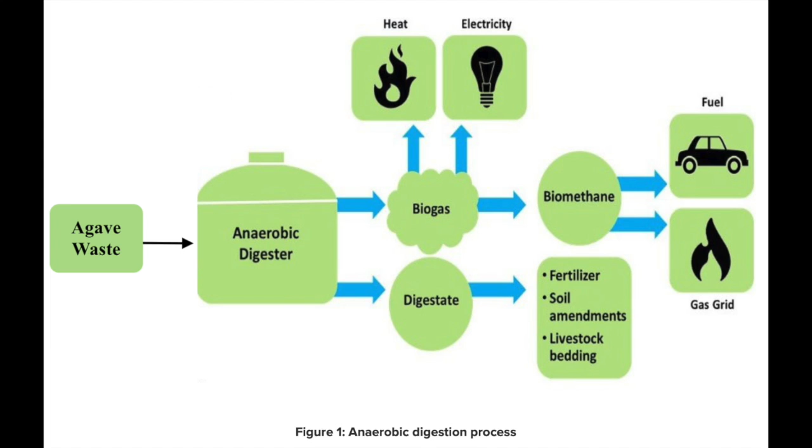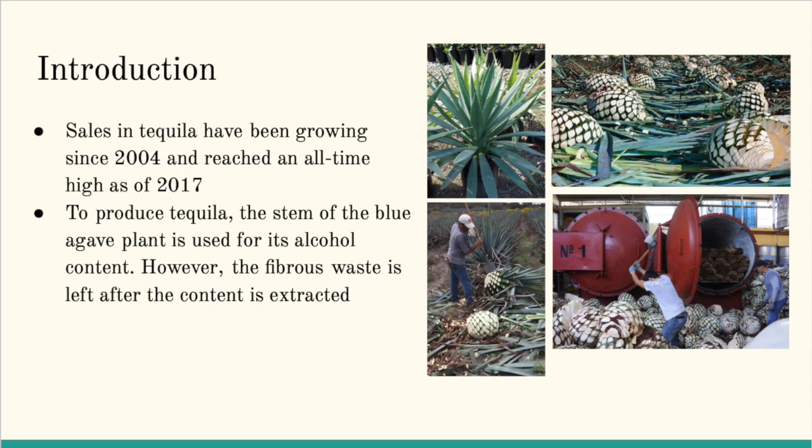Tequila distilleries employ the use of the blue agave plant to produce mass amounts of tequila per year. To put this into perspective, from January to May of 2018, according to the Consejo Regulador del Tequila, the agency that oversees tequila production in accordance with regulatory standards, 132 million liters of tequila was produced in the protected regions of Mexico.

As you can see, the volumes of tequila being produced and the growth of tequila sales are consistently increasing with every passing year. This implies that the production as well as the demand for the product is also increasing every year. Because of this trend, we decided to implement a plant that produces biomethane from the waste accumulated from these tequila distilleries in Mexico employing the technique of anaerobic digestion.

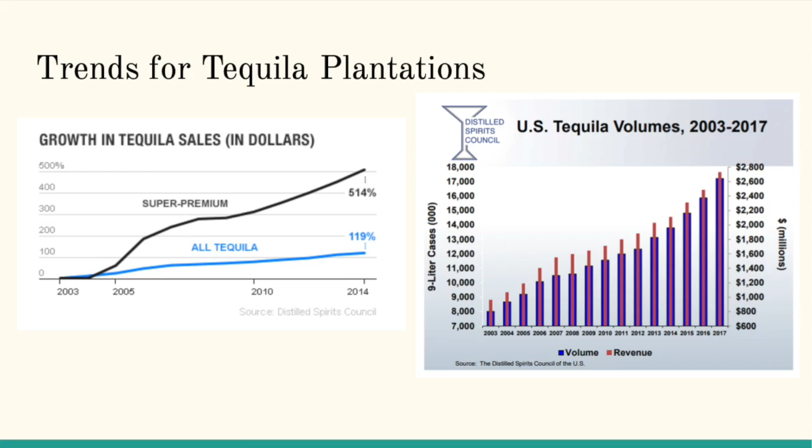The inspiration of this proposal is derived from the current outlook on climate change and the use of fossil fuels versus renewable energy, such as biomethane. Our goal is to implement our recycle plant into the tequila distilleries in order to reduce their carbon footprint by the use of biomethane instead of fossil fuels.

There have also been other biomass to biomethane projects that include avocado stones, mango stones, and other agricultural materials as inputs to the process. The graph from a paper written by Pål Börjesson shows the average percent in reduction of greenhouse gases when petrol or diesel is replaced by biomethane.

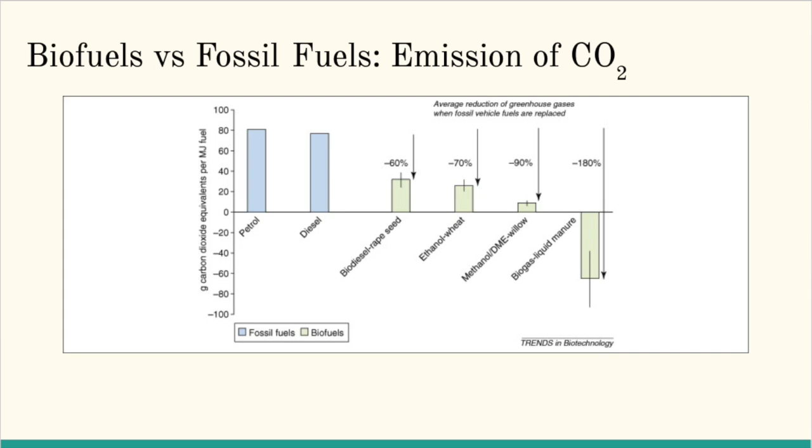The use of a plant-based energy source reduces carbon dioxide emissions, which is why we ultimately chose blue agave as the process input. Blue agave uses a metabolic pathway that greatly reduces water loss and increases carbon dioxide intake called crassulacean acid metabolism, or CAM. During CAM, the plant stores carbon dioxide absorbed at night and performs photosynthesis during the day.

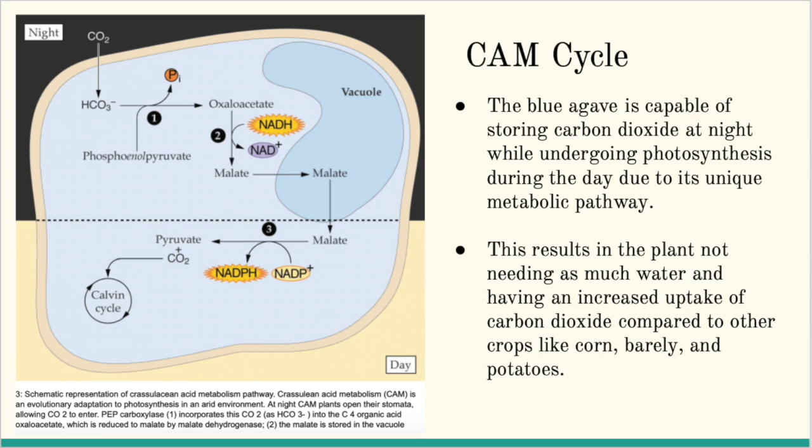This means they can close their openings on their leaves during the heat of the day, saving a tremendous amount of water compared to other crops such as corn. It also allows for the use of higher levels of carbon dioxide than other crops like wheat, barley, and potatoes.

During the anaerobic digestion, two species of cellulose-degrading bacteria will be used to break down the blue agave. Ruminococci, R. flavefaciens and R. albus, are found in the rumen of horses and cows and play a major contribution to plant cell wall breakdown in the large intestine. Based on the experimental data, the major chemical composition of the fibers in blue agave is 74.6% cellulose and 21.1% lignin.

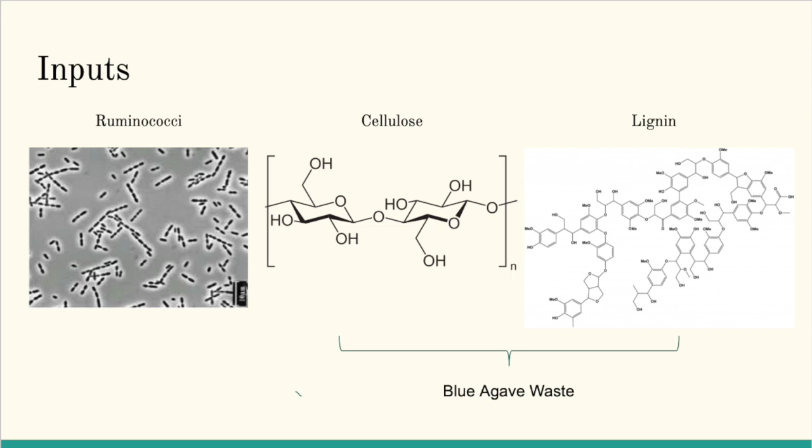For our production plant, the inputs will be the ruminococci, acetic acid, and blue agave waste. The output for the process will be carbon dioxide, methane, and the solid waste of the soil conditioner. The agave waste will be brought in as a fibrous solid and be ground into small particulates and heated up to be broken down further.

Because our system is a batch system, the bacteria and acetic acid will be present in our reaction vessel. The blue agave particulates will be added to our reaction vessel for the cellulose to be degraded mostly into methane and carbon dioxide. The gas products will enter the scrubber in order to separate the methane and carbon dioxide. As for the solid liquid waste products, the solution will be separated in order to obtain soil conditioner that can be used when planting agave plants.

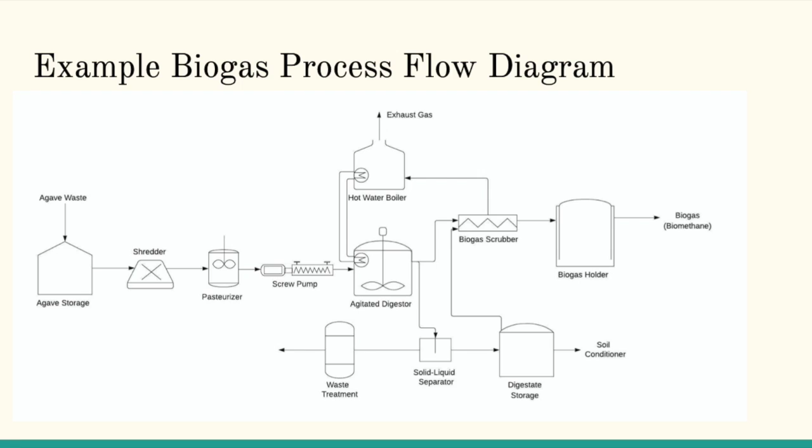This is an example of a process flow diagram of our plant. Our design alternative 1 includes breaking the reaction into two reactors to produce methane, one reactor for the acid phase and one for the gas phase. A similar process can be used for the alternative design 2.

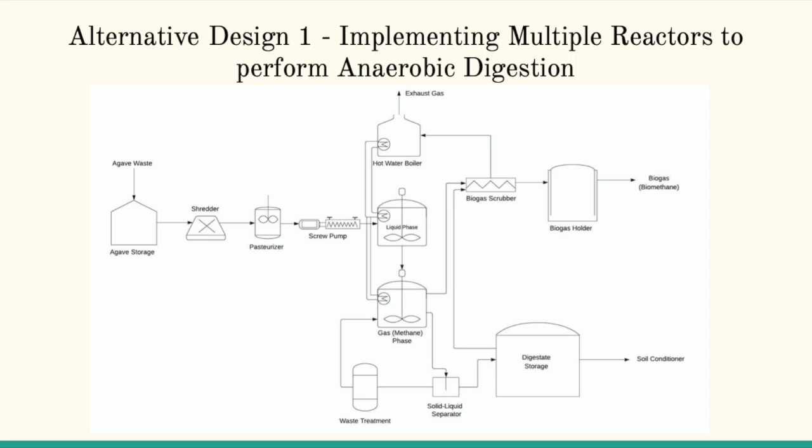Instead, the solvent used to dissolve cellulose could be changed to 1-allyl-3-methylimidazolium chloride and 1-ethyl-3-methylimidazolium acetate. The use of these strong ionic liquids allows for the cellulose to be broken down into its glucose compounds, which will require less bacteria to be used for the process. However, these solvents are extremely costly and are not viable for a profitable plant.

Other successful processes have demonstrated the use of 4 reactors, one reactor for each step of liquefaction, acidification, acetate formation, and methane formation. Potential challenges with these methods would be that the cost of multiple reactors is very expensive, as well as the solvents and other components needed if the process was split up into parts.

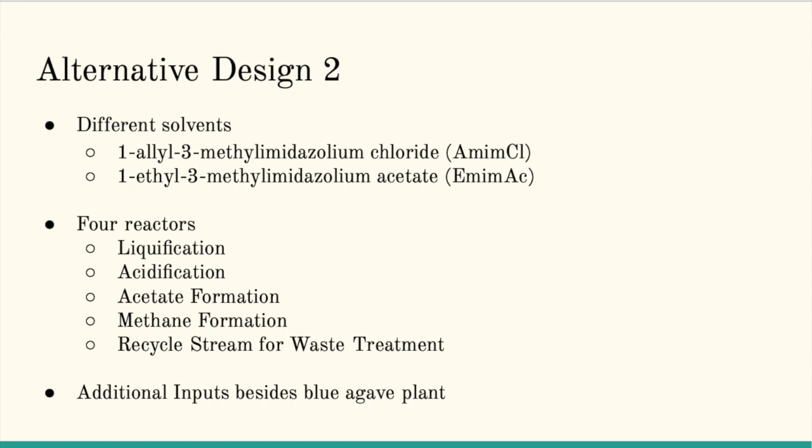Operating at such high pressures is a safety concern and would need further research on how to operate at these conditions. Various types of inputs include corn, barley, wood, peanut shells, and wheat to be used as inputs as well. This, however, requires more solvents and bacteria due to the variety of chemical compositions for these compounds.

Some design considerations to take into account when building our anaerobic digestion plant are environmental impacts, social impacts, safety hazards, and their precautions. Some positive environmental impacts include reducing the greenhouse gas emissions, which mitigates environmental pollution, as well as the digestate being recycled and used as soil conditioner to provide the blue agave with a beneficial growing environment.

Some negative environmental impacts include causing the rate of excess in crop demand of blue agave, as well as ammonia emissions and nitrate leaking of digestate if improperly stored. The main social impacts include changes of natural and agricultural landscapes while building our new plant next to the tequila distilleries, risk of pollution incidents, odors, intrusion of land, and the shredder being extremely loud.

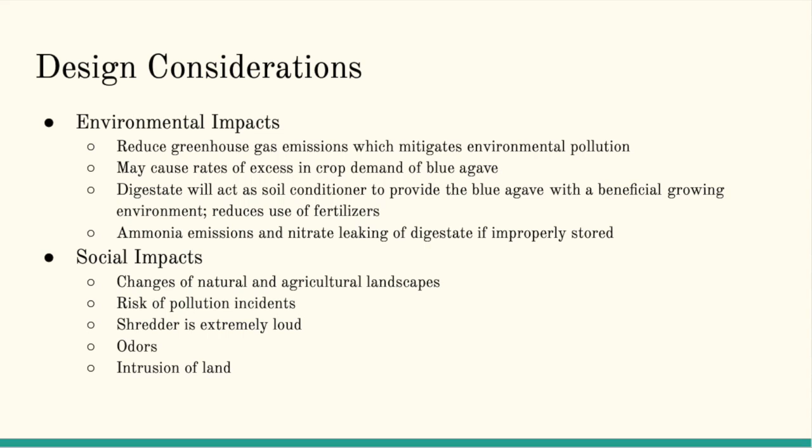Some safety hazards that we need to consider are that the biomethane, as well as the exhaust gas being produced, is combustible and corrosive, and the generation, transportation, and flaring of the biomethane can lead to oxygen deficient atmospheres, which can go hand in hand with the environmental impacts as well. The corrosive nature may also cause the equipment to break down, which would cause additional safety hazards to the operators on site.

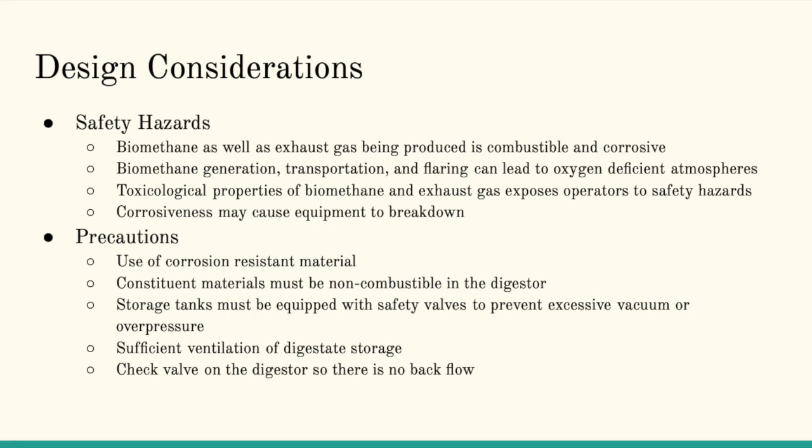Some of the main precautions that need to be taken when building this plant are the use of corrosion-resistant material, as well as making sure the constituent materials being used in the digester are non-combustible. As for the equipment, the storage tanks must be equipped with safety valves to prevent excessive vacuum or pressure, and check valves need to be on the digester so there is no backflow of biomethane.

Based on an input blue agave waste of 11,000 tons per year, or 66,000 pounds per day, for an operational time of 333 days per year, an input of 66,000 pounds per day of acetic acid will be used as well in order to be used as a solvent. Because our agave plant is considered waste, it will not be considered a large purchase compared to our other costs. Also, because the bacteria will be grown in our plant, the bacteria and media will need to be purchased and grown before the process occurs.

For acetic acid and bacteria waste, because it is considered a biohazard, it will have to be treated. Soil conditioner will be included when planting blue agave to maximize the waste of our system. Based on values from the Department of Energy of methane, we will have a profit of $151 million per year on an input-output level assessment.

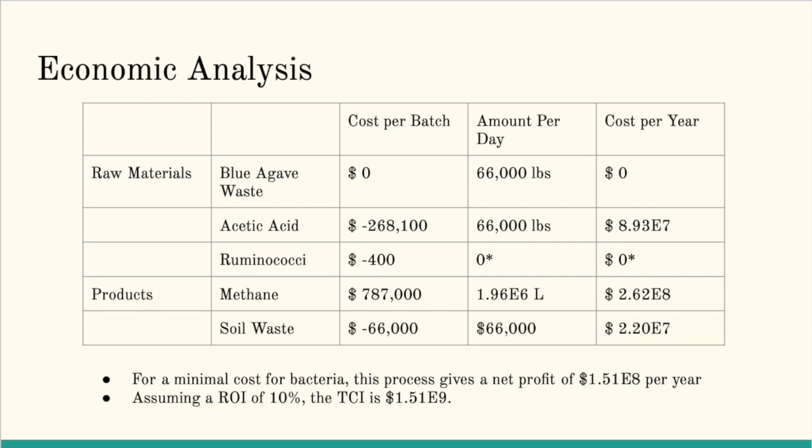Assuming a 10% break-even capital cost, our total capital investment is $1.5 billion. Because our plant is a grassroots project, it seems viable and should continue. We are claiming that our plant is viable due to the fact that building an anaerobic digestion biogas producing plant from the ground up would cost less than $1.5 billion.

In order to improve our assessment, much more research needs to be done for the equipment and utilities for our plant, including manufacturing, cost of labor, cost of installment, and other miscellaneous costs. Because our process occurs at high pressures and temperatures, the cost of these utilities will change our input-output level assessment.

As for the impacts, the most important social impact includes changing the natural and agricultural landscapes to build our plant. This will directly affect the community and its people within close proximity of the production plant. As for the environmental impact, we are focused on reducing the carbon footprint of the tequila distillery.

By implementing a recycle plant, we are reducing the use of fossil fuels, moving towards an environmentally friendly fuel source. Because we are creating solid waste in the process, it needs to be handled with extreme care to ensure no accidents occur in the plant.